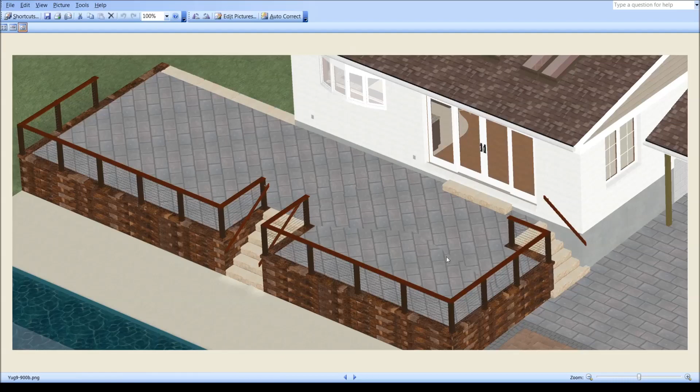But the way I took up the slope in this was everything sloping from here out to here, and the same all the way around. And right here it's level across the top of this stair here, and then it slopes severely right here to its final resting level for the whole margin. And you can see that I've added an extra step stone and an extra one of these capstones here, and I've eliminated that bottom piece of cable from this section here.

And this probably meets code. It's probably a really close call to have that 36-inch height here. It's obviously 36 to the railing all out here. Here it probably gets a little dicey. So what this means is the person has to be careful. I haven't sized exactly how high these patio wall stones are, nor how high the caps. I think the existing cap, I think Rob said it was 3.5, but I never finished modeling that.

But all of that will have to be accounted for, as well as how these cable rails are going to handle it here. But that was the way I did that, and your patio contractor or wall contractor may have different ideas, but that was the way I did it.

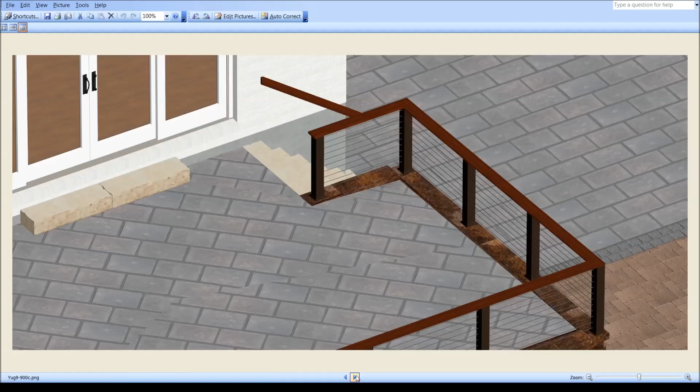And the next thing, I talked to Carl about this: the bay window is going to be one of 2 heights, and we've already specified it's going to be the shorter one. It's going to be a 36-inch high one. And the idea is to push that up all the way, and there's room to have the header across there.

Push that up all the way so that this piece of fascia that already exists and is level with the top of these windows continues around and across the top of those windows there. And if the door is shorter than that, then you can just use expander at the top part of that door to make that gap complete.

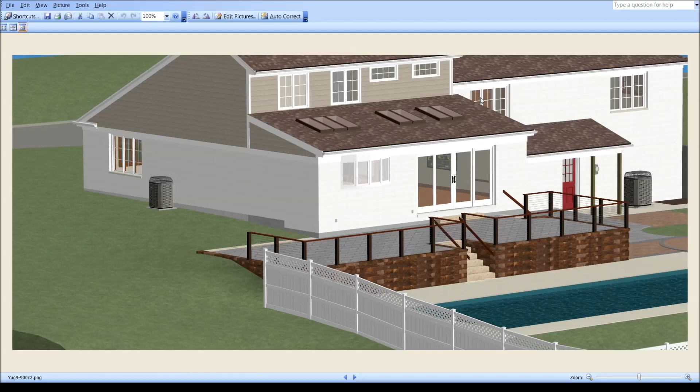Also, it's probably obvious, but this end of the roof just finishes an inch or so beyond. I have this piece carrying down. All of this siding is getting replaced. You don't have to carry this piece down one way or the other. And then the roof over here goes over a little bit on that side, obviously just to cover the wall on that side. And then dies up under. This is not quite complete there, but it dies up underneath that one, hopefully like this.

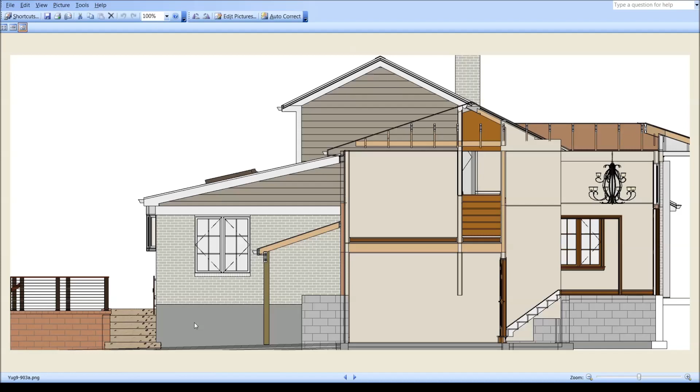And this is how everything should look. I have to add that access panel, and in the final drawing it's added, and it's right here where its edge is aligned with this edge.

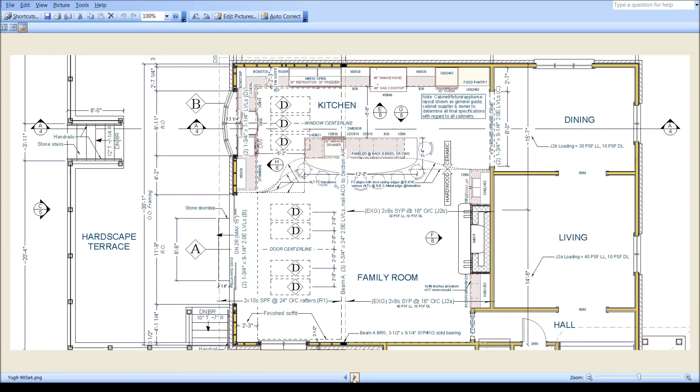Next, and I don't want to belabor this point, but it's with regard to these floor covering transitions. After I stepped through this, I'm really hoping you can just find one product that covers all of this, because I found no real pleasing way to make this happen, either on paper or in reality. And that's the square rectangular bar that we've been working with. And I did bring this curved one back in for consideration just for this film, because I'm pretty sure we had eliminated that.

And with the rectangle one, you can use any of these transitions here. So that's the final seat. And if it's the round one, though, you're pretty much limited to this transition here. So I limited my modeling to those 2. That would work with either of them there. And maybe, depending upon the floor covering, this looks better in reality than it does to me this way. But I didn't think there was any way to end that floor covering anywhere but at the rear of that island cabinet, because that's just, no.

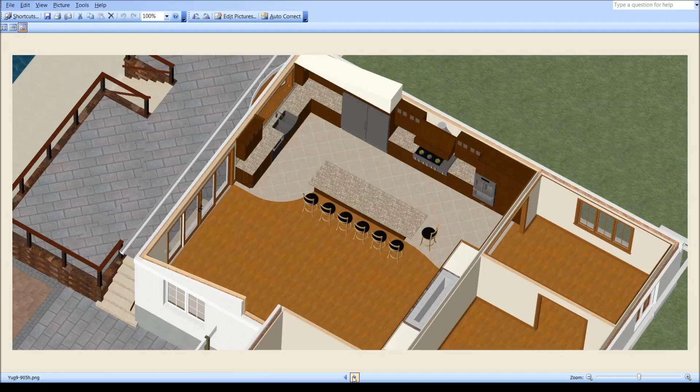And this end doesn't help us at all, and maybe that has to just come all the way over like this, or like I said, some miracle product that can just do this and have this space altogether.

Anyway, the final thing I just want to mention is, with regard to this facade here, the face of this wall, which carries the crown, and the crown comes straight across, dictates really where the face of this stone has to end, because it has to go up behind this crown. Same with these soffits. The front of these 3-inch soffits finish at the front of that wall there.

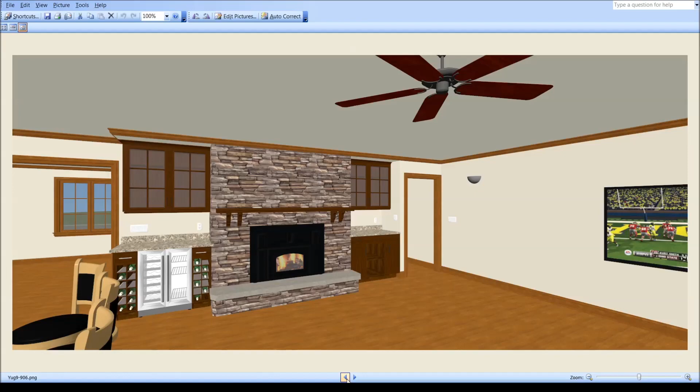So maybe that wall is built deeper or less deep, because I know once the existing stone is taken off of this, 2 inches worth of added stone is not going to bring that out far enough for this. So that was the last thing I wanted to mention with regard to the project in general. But I will flip back here for a minute.

But that is all I wanted to mention for now, in case this project gets underway. As I mentioned in the email, the permit's been approved today, Monday, and can be picked up any time.